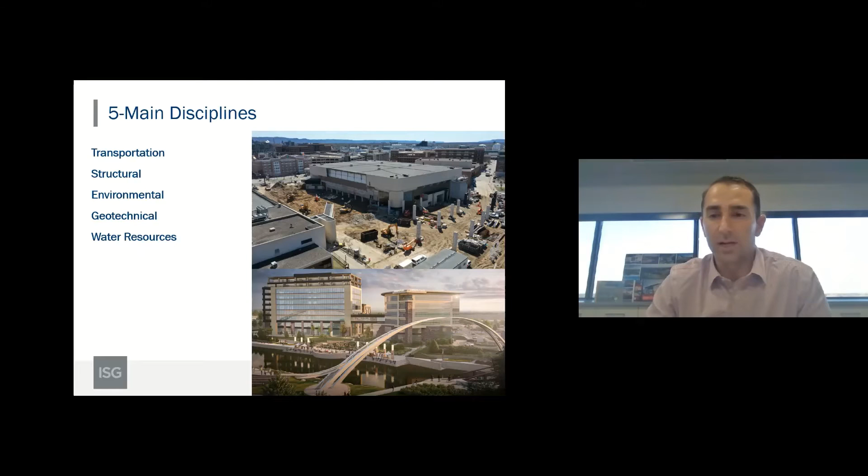So when you look at powering the earth and how this might tie in, every different discipline in some way deals with power. You have structural, building power treatment facilities, or structural with wind turbines. Environmental, looking at air quality with turbines. Geotechnical, again with foundations. And water resources, looking at how you can use hydroelectric power, or even use water reuse to cool down power plants or provide power in different ways.

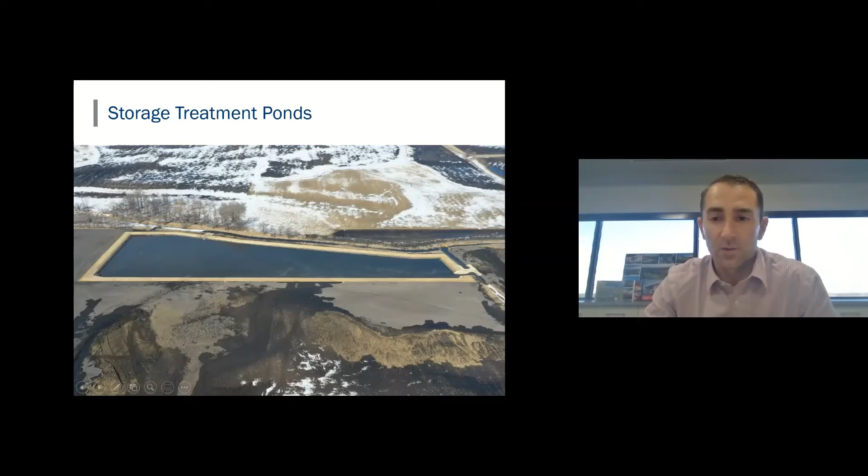Also in rural areas, we have a lot of excess stormwater that runs off of wetlands, agricultural fields, and roadways. So we design very large storage treatment ponds where we physically dig out a big hole and allow the water to sit and flood into it. This is one example of a large one I worked on, built last year. This stormwater pond is about 10 acres in size, and you can see around the whole perimeter where we built up large dikes, then diverted water, as shown on the right, to flow into it.

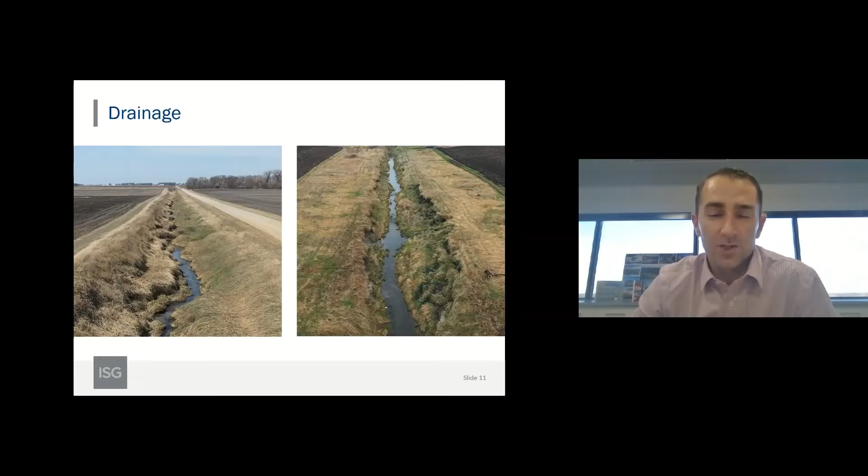I do work on a lot of drainage systems, in Minnesota and Iowa. When you look at public rural drainage, it's similar to urban stormwater. So where there's stormwater networks and storm sewers underneath roads in town, we have those in rural areas as well. I work on some open ditches and open channels, which are shown here. What I work on with these projects is trying to repair and maintain them so they don't cause as much erosion and still have good conveyance for the hydraulics.

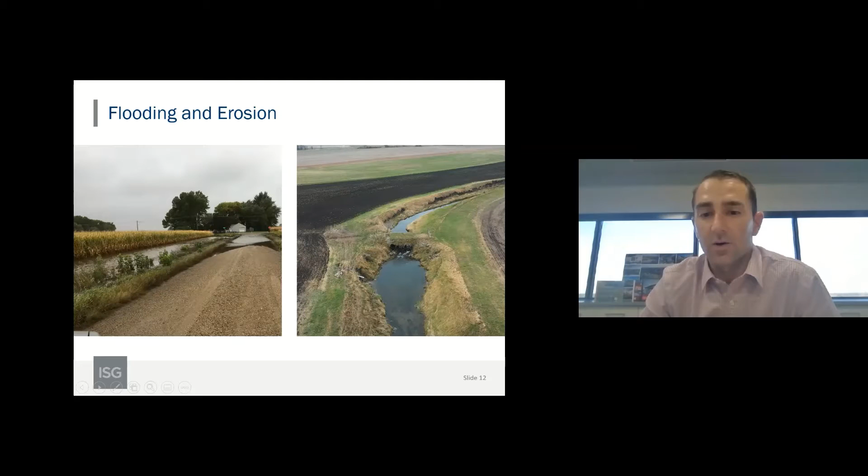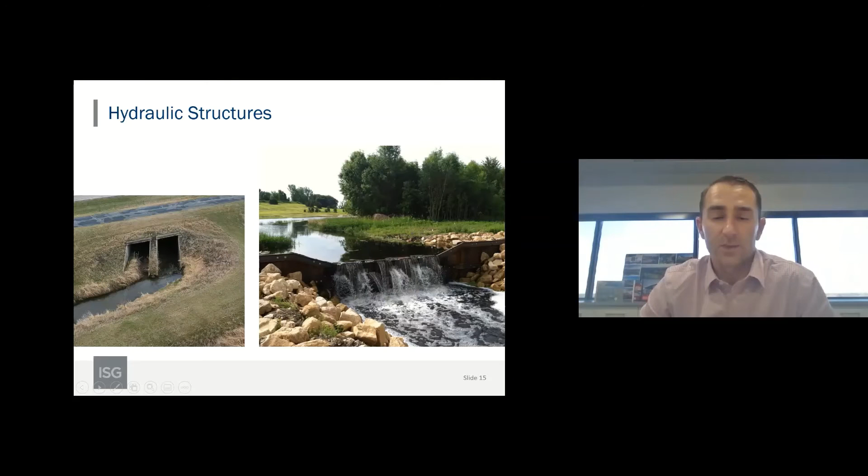I look at a lot of hydraulic structures. I deal with a lot of water, a lot of runoff. This example shows how water can move underneath roadways, through large box culvert structures. And then again, looking at weir structures, which other people can call a dam, but this is looking at holding water at a specific level or flow rate.

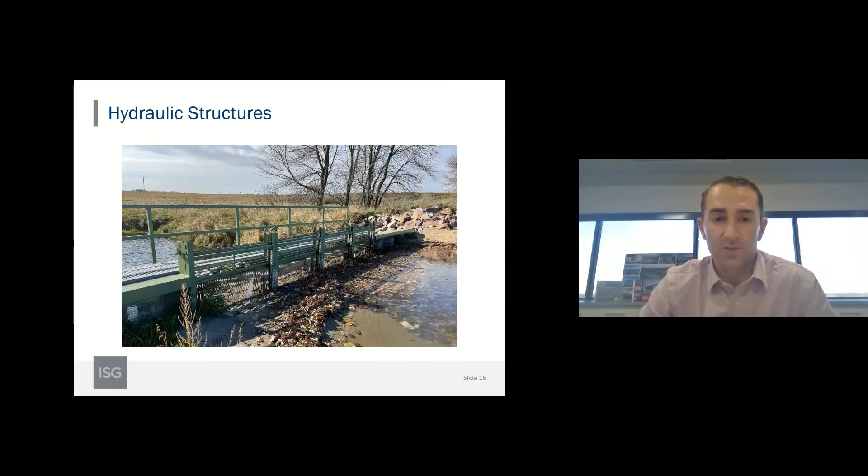Other hydraulic structures I deal with are more for lake management. This is showing a compound outlet structure on a lake that has internal boards shown in between these grates, where you can put boards through to change the water depth of that lake. So I've worked on a few projects related to that, restoring some of these lake structures so they can be managed for different aquatic habitats.

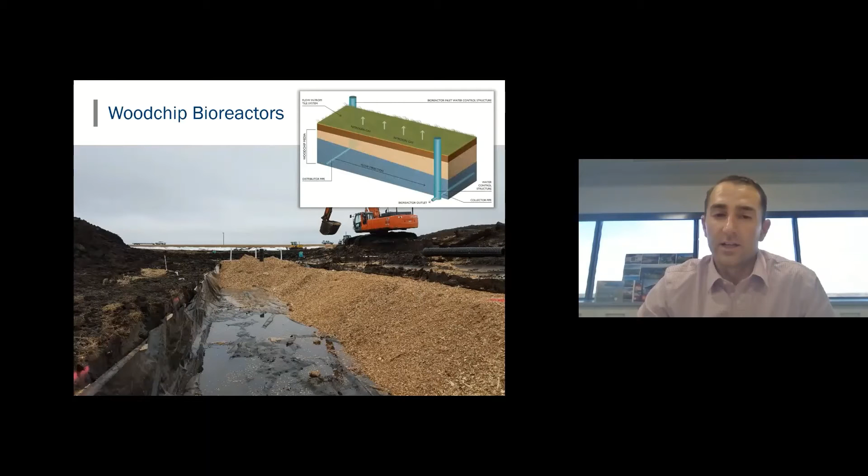Some water quality things I work on specifically look at drainage areas where there's a lot of groundwater being drained out. You do have the potential for a lot of leaching of nitrates. These are called wood chip bioreactors, where you dig a big trench underground, fill it with wood chips, and allow anaerobic conditions to absorb some of that nitrate from the drainage water. The biggest thing with nitrate is its impact on downstream drinking water, especially for large municipalities that pull drinking water in for their potable water distribution.

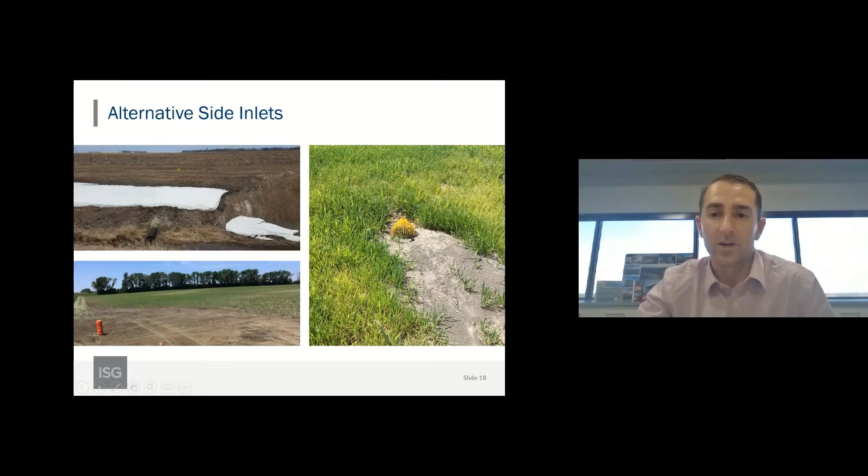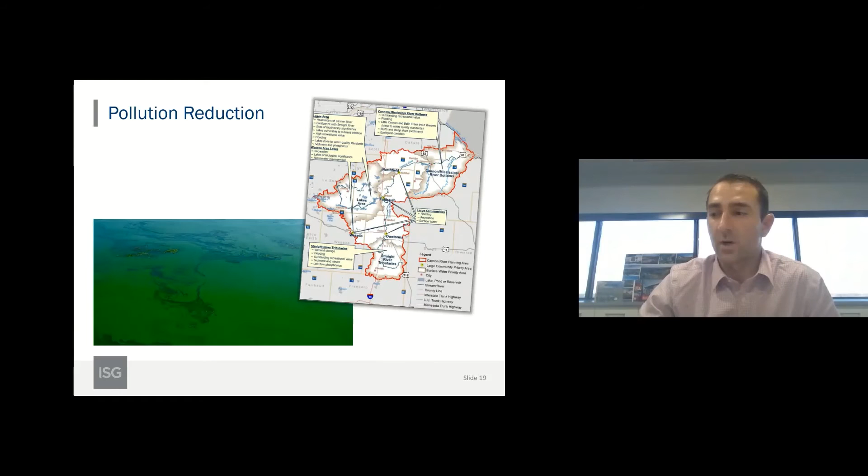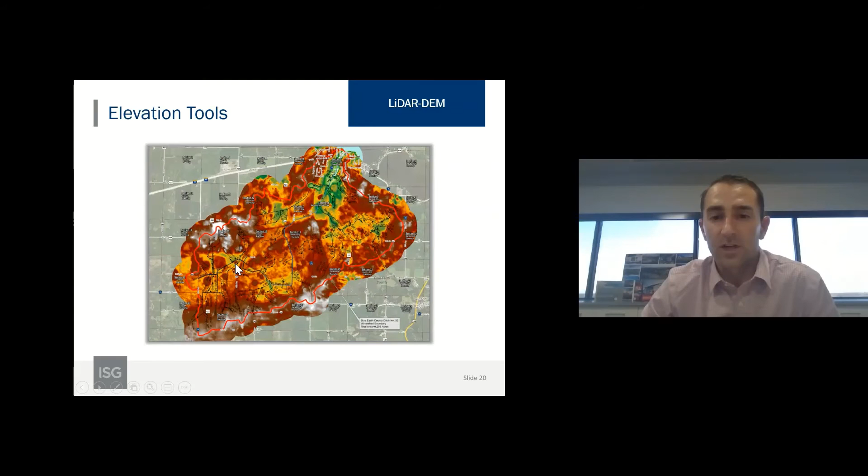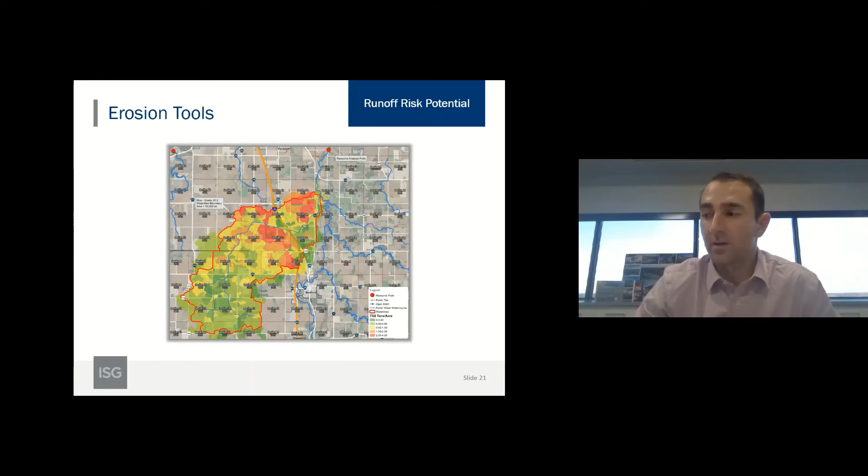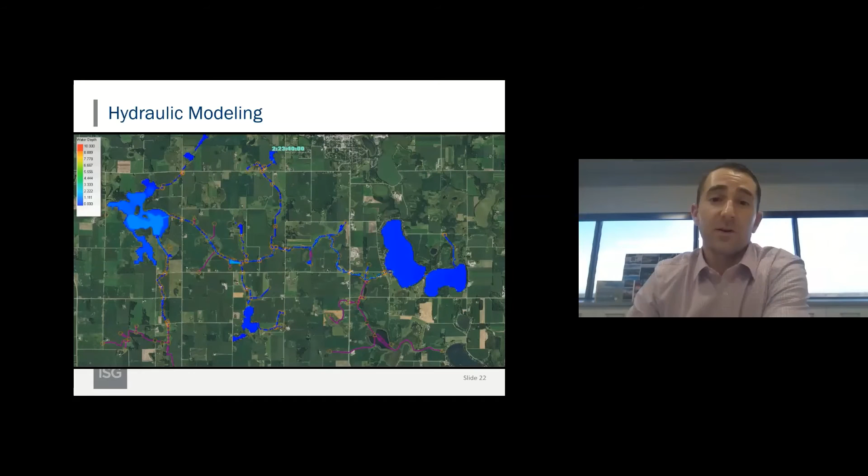And ultimately, you can use this for source water and figure out where you have water to use for power generation. That's the last thing I wanted to end on: powering the world. Civil engineers do a lot of different projects that work with power, specifically building power plants or working on wind turbines and solar farms and the development of solar fields.

One thing more specific to the line of work I do - I personally don't design many of these systems, they're very complex - is looking at hydroelectric dam structures. Really what you do is use water to your advantage.

Water comes with a lot of power and force, and ultimately creating hydroelectric dams involves building a large dam structure and allowing water to move through at some rate or path. Then you have essentially an underwater propeller that spins with the force of the water, using that to generate power into turbines. Those turbines can then distribute power out to the grid.

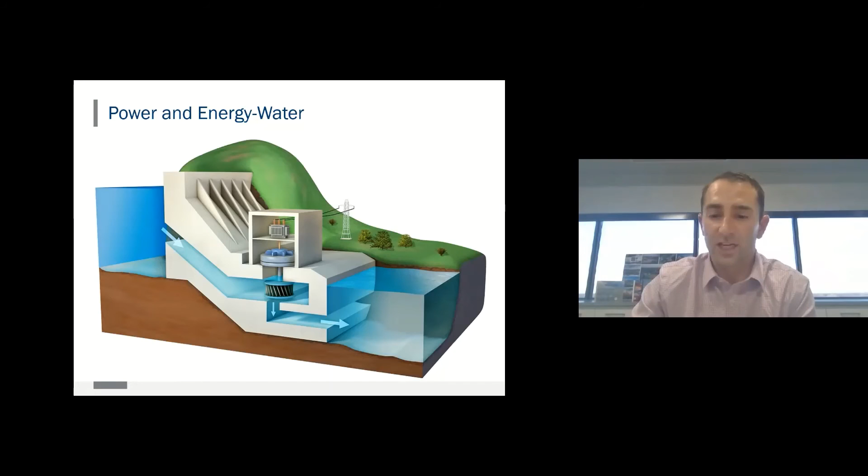This is a very common thing that was done. If you look back to our first settlement days, this is where a lot of the mills and industries were created right along rivers to use the power from the water for their fabrication and facilities. So this is just a schematic, and this is another example of what one looks like in real life.

Obviously, when you build these types of structures, there's also a recreational value - you can see in the back where boats and other things can go out onto these waterways. But again, it comes down to damming up the water, creating a different hydraulic head through the structure, and using that dissipation from the water for power generation.

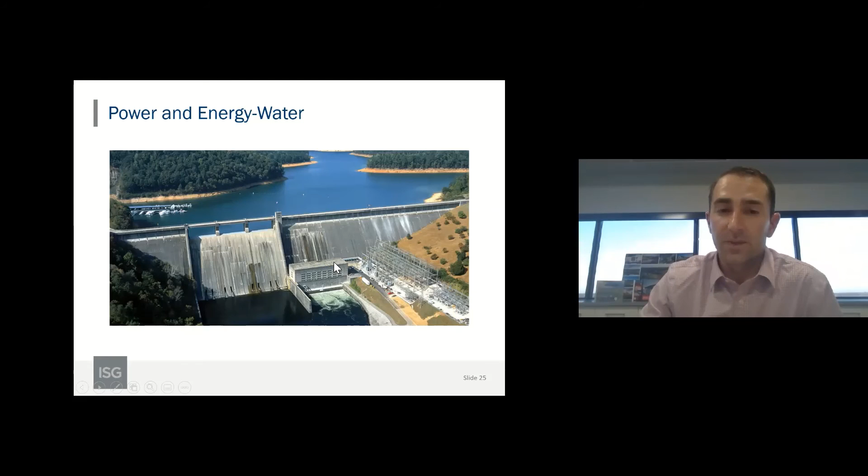What we've seen in the last several years is a huge decline in the water levels, and ultimately that impacts how much water can get distributed out to citizens using that for drinking water.

So it's really challenging to get the water to use when you have less rainfall, less snow melt, and ultimately less water capacity for individuals to use.

So that's kind of my thoughts on power, distribution, and energy. With that, like I said, I work on a lot of water projects, so I don't necessarily build power plants or have the same background as other engineers may have. But the first thing that came to mind for me is knowing the force of water and how you can use that to generate power.

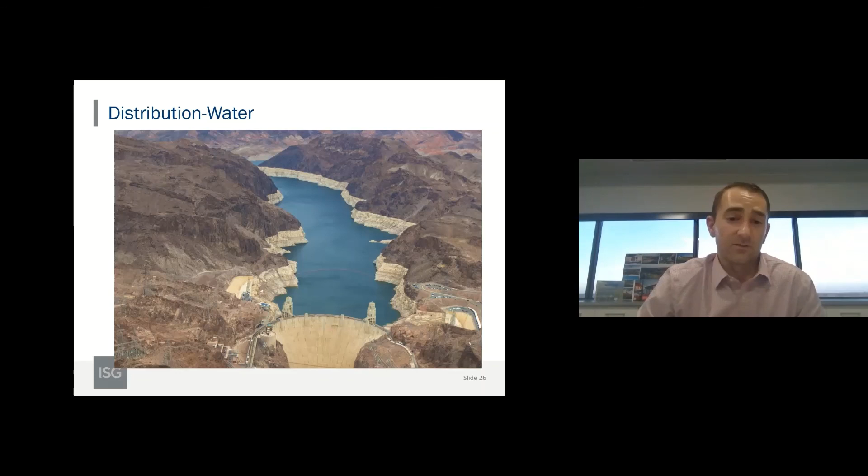In general, a 4-year civil engineering degree can get you a long way to do this kind of work and other types of work that I outlined in those 5 disciplines. It's a pretty rigorous program - tough to get done in 4 years - but it's definitely a fun career path that I chose, because you can get outside and do a lot of things, where other fields kind of have you pocketed inside and you don't have the ability to get out and about and look at things.